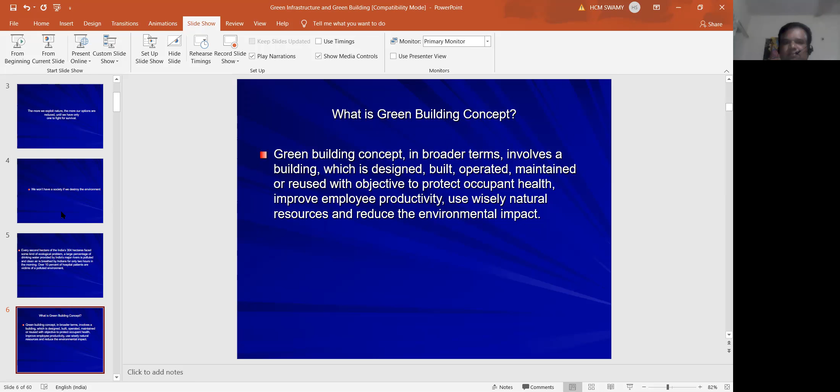In simple words, green building concept is to provide habitat with good environment and good atmosphere to the person staying in the building. How to do that, and how to make it? That is our next question.

Another question: why should we care about green building? First question: what is green building? It is nothing but environmental friendly designing of the building, a design for environmental safety meant for habitat and healthy environment. Why should we care about green building?

During the last 30 to 40 years, we have had bitter experience of global warming, ozone depletion, resource depletion, energy scarcity, ecological toxicity, human toxicity, acid rains, etc. These are all giving caution to the people or the public who are leading their lives carelessly without considering the environment.

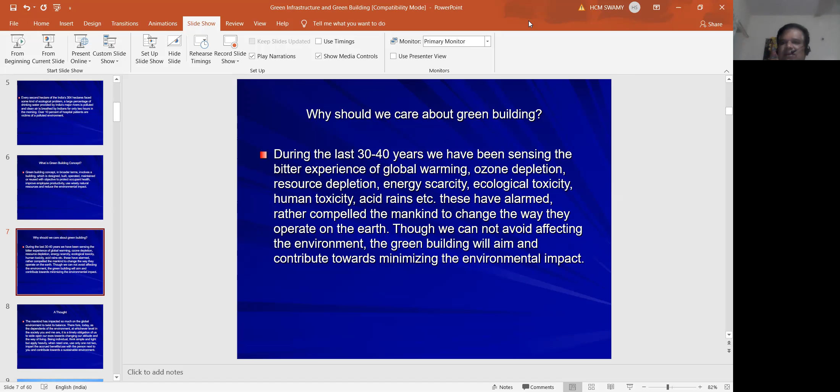So our interest is to make environmental friendly building design. How to make environmental friendly building design? Now, it is only a thought. The mankind has impacted so much on the global environment as to twist its balance.

Ecology of the earth is highly affected by the human population compared to other animals. So how to control the pollution or the pollutants?

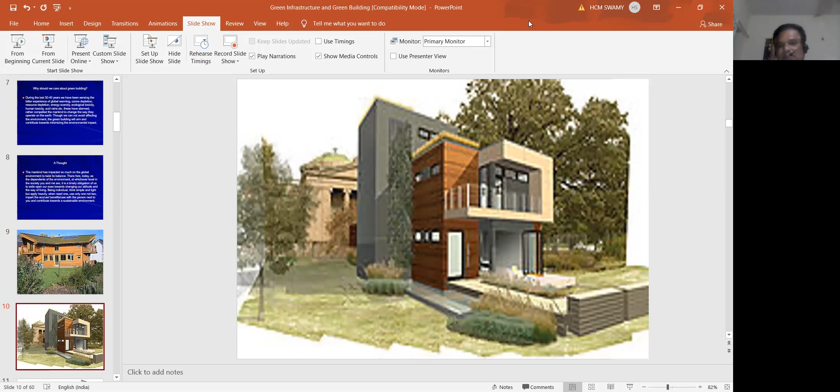How can this be done? What is the method to do this, which we are showing in the coming slides? This is another building also designed using the green building concept. Please see this slide showing how the green building concept has been implemented in buildings.

There is photovoltaic generation of power, roof planting, and we are improving the insulation of the walls. There are automated ventilation controls. We are controlling power using lighting control sensors, high efficiency light fixtures, rainwater utilization systems, and high efficiency heating equipment.

In addition to that, there is restriction of sunlight falling on the building. That means surrounding the building, we grow and plant trees, herbs and shrubs, which reduce the temperature of the environment to a minimum.

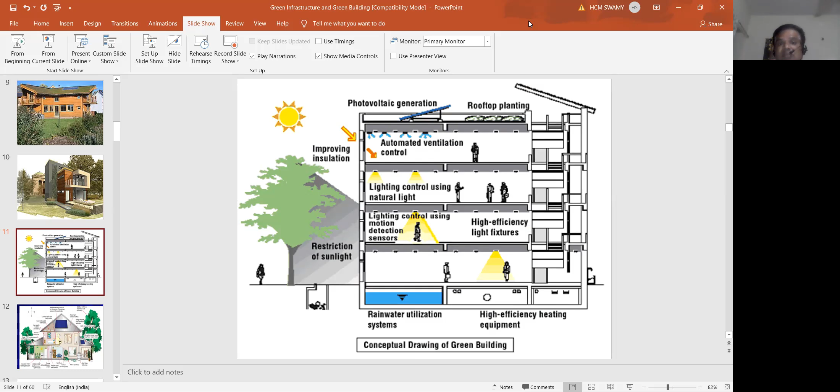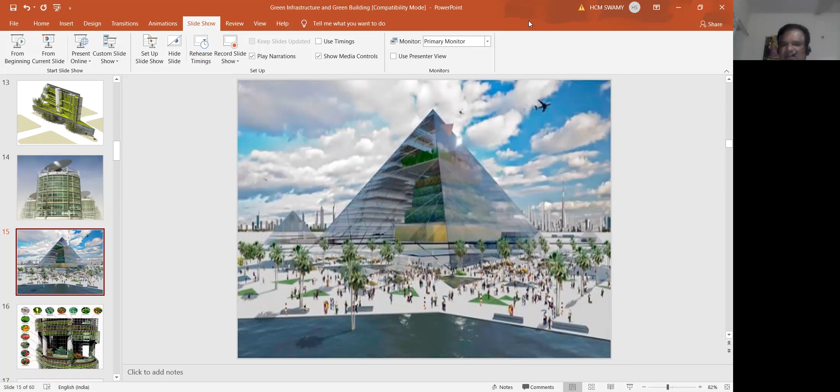Now this is another diagram showing the green building concept, and this is another structure showing green building. This also contains the green building concept. This is a pyramid constructed using green building technique.

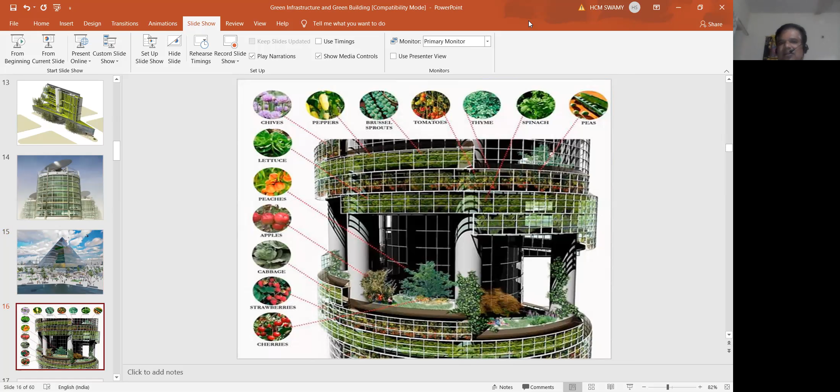This slide shows different types of plants planted in the building to maintain the temperature at a minimum and demonstrate the green building concept. This is a high-rise building showing the green building concept.

This is the green building constructed by the healthcare division of Heartland Builders. There is a healthcare center that gave the contract to Heartland Builders, and they are making a building for green building with Heartland Builders. The contractors are Green Building with Heartland Builders, LLC.

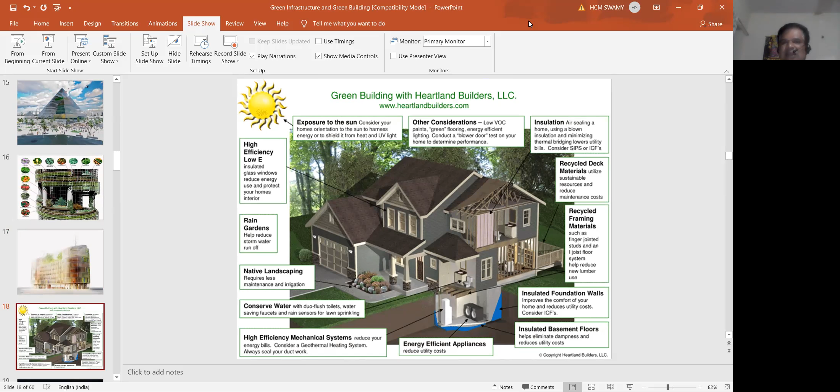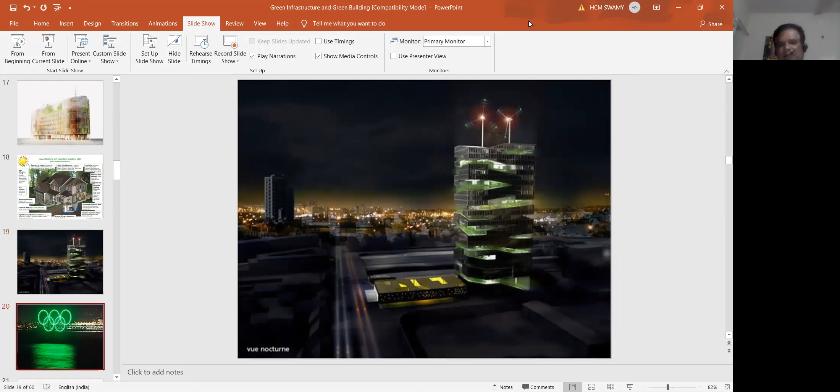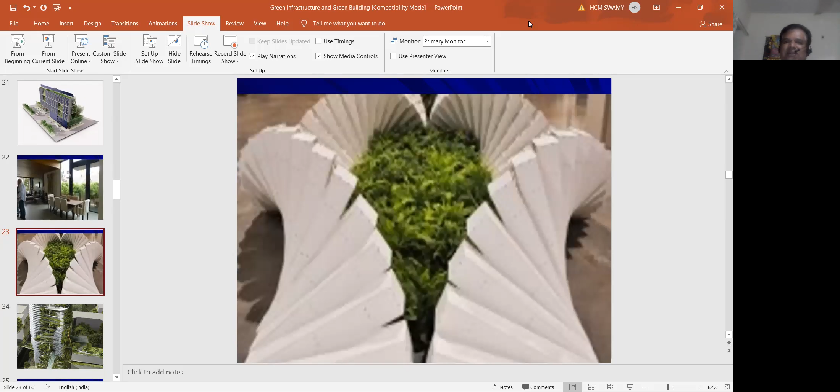This is another structure which shows the green building technique. This is a cafeteria in a hotel in which the green building concept has been shown. This is the way we produce an environmentally friendly building. It is meant for dual purpose, one for decoration, another for green building technique. It maintains the temperature minimum.

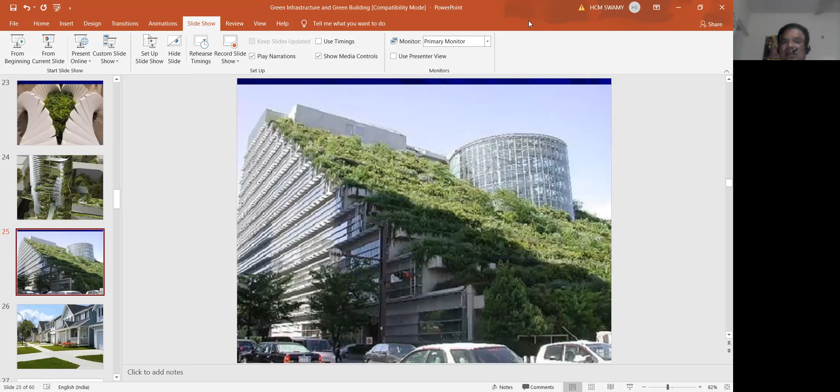This is a tall building in which green building technology has been applied. This is another structure in which green building technology has been implemented. This is a series of residential flats in which green building technique has been implemented.

Now the important thing is, 60% of the power is consumed for air conditioning. As I already told, plants are planted or grown inside the building or on the rooftop, and the cladding systems are given in such a fashion that power consumption in the green building has been restricted to 60%. The power saving is restricted because the air conditioning system itself uses 60% of the total energy consumption.

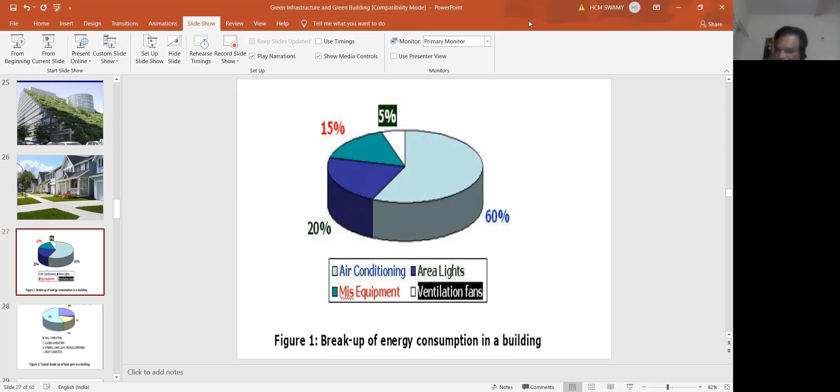Area lights consume 20%. Other equipment consumes 15%, and ventilation fans consume 5%. So the maximum energy consumption is 60% for air conditioning. If we maintain the temperature inside the building at a minimum, we can save 60% of the power. This can be done by using green building technology.